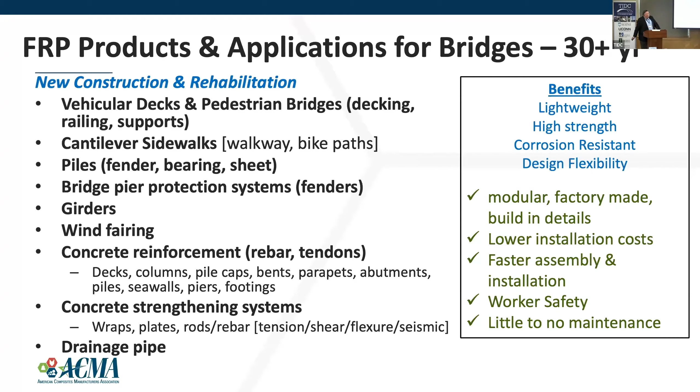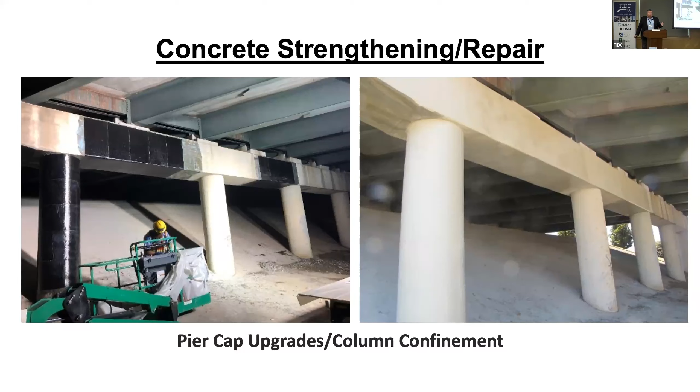So it all started off with concrete strengthening, right? There are 10,000 installations where composites have been used to strengthen piers, bents, columns, upgrades, seismic. So this was kind of like the first installation of technology. Today it's commonplace. No one asks the question. It's a given. We have guidance, we have designers, we have very experienced personnel, both in industry as well as structural engineers that know how to do this. This is wonderful to see such a mature part of the industry.

Prefabricated pedestrian bridges, first being all pedestrian bridges, but even something, and I'll talk about this, in cantilever sidewalks, where fast installation was the big deal. So when you look at this particular installation, this is the highway going to Dulles International. They had to shut down an 8-lane highway for 15 minutes to install this. They couldn't do it unless it was made out of composites. So it's that fast installation.

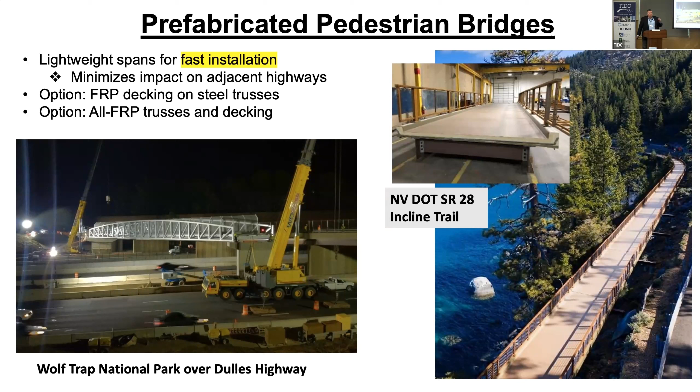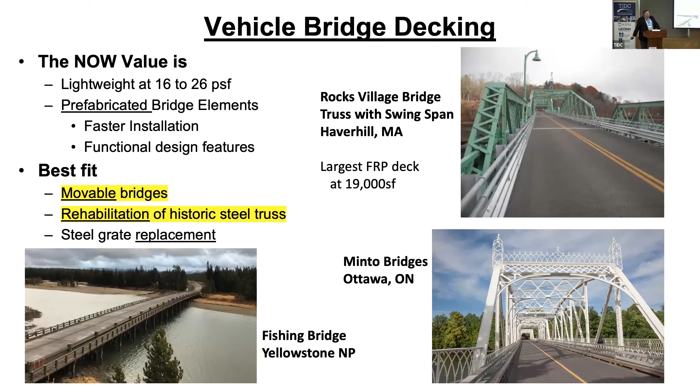Looking at bridge decking, very much involved, and this is where Roberto and I, back in the day, were involved with this. Developing structural shapes from pultrusion that provided unique applications, and they were most applicable to movable bridges as well as restoring historic bridges. So a couple of examples of those, and that continues to today.

Cantilever sidewalks, adding a structure to an existing bridge. So it's all about lightweight; the ability to provide pedestrian and bike access has increased across the country exponentially. And we could do this very easily as long as we specify those components correctly.

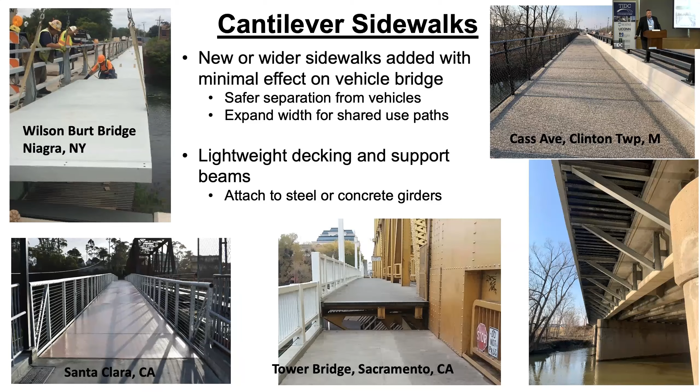Very much a part of University of Maine and the concrete filled arch girders. This has now become commonplace. Although it's not in every state, it's getting there and it has its unique application. But it also led to getting standards with concrete filled tubes for AASHTO. So that was very important.

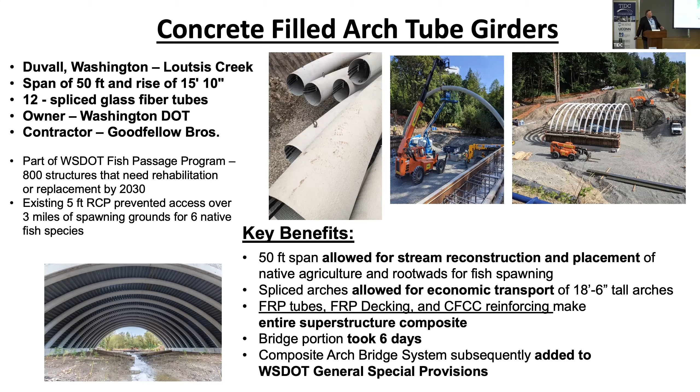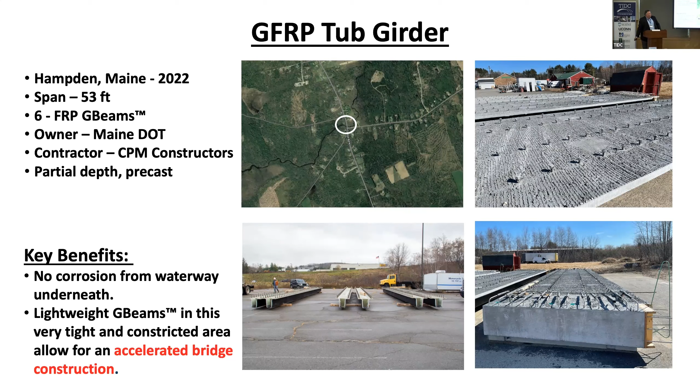And we're going to talk a little bit later about the tub girder, very much an iconic success story, providing another tool in the toolbox. I'm not going to touch too much on this. Rebar. Rebar has taken one heck of a journey, and it's always been on the leading edge of being accepted, starting from a state-of-the-art report to the first design guideline, going through 3 iterations.

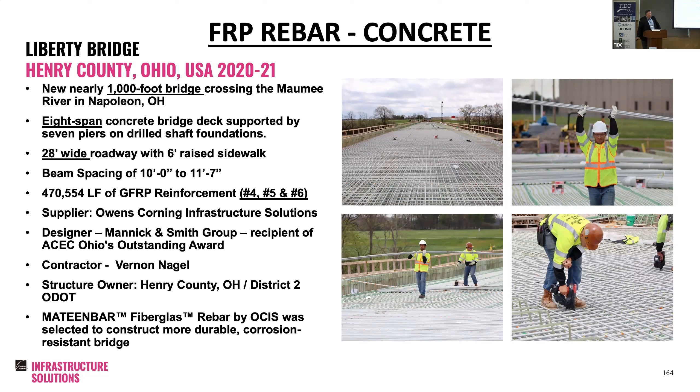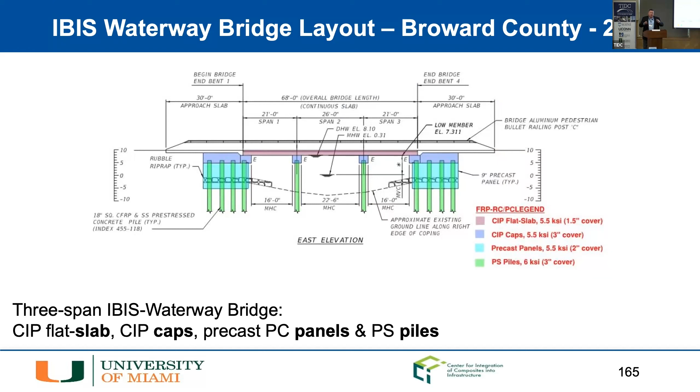So there's many other installations, taking that technology and applying it to flat slabs, cast in place caps, precast panels, even pre-stressed piles. So now we're starting to think about all the different elements that go into a bridge dealing with concrete. So we're taking the baby steps, but now looking holistically at what these structures can be built out of.

So, in the advancements in materials, we see basalt fiber. A couple of people are going to talk about thermoplastic composites and field bending. There are other resins other than vinyl ester resin that are being considered for rebar materials. And with all of this, standards are coming, and these standards are allowing the tools and the instruction as to what end users can do.

But the other big thing is the business standpoint. What we have seen over the past couple of years is that those who are specifically manufacturers for rebar, they're scaling up, they're increasing the rate as to what has been done before. They're expanding their facilities, they're building new facilities in different parts of the country, which is very exciting. And they're also modifying their equipment, making it much more efficient.

So there is a business case here that always needed to happen, but growth needed to happen a little bit first before they would make that decision. So this is very, very optimistic. And that's why you see so much about fiberglass rebar or FRP rebar.

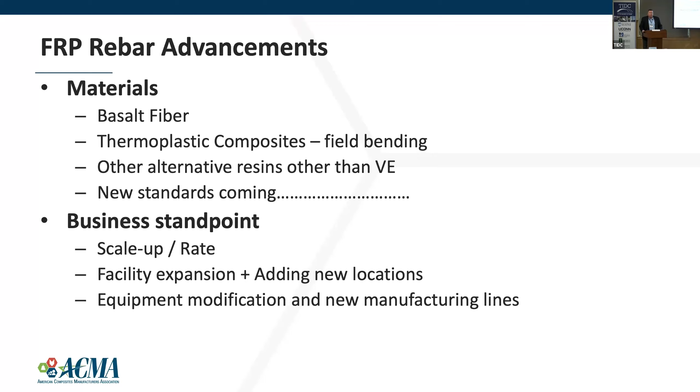And then came the FRP rebar code. And I'll tell you that this was one heck of a journey that took a village. The writing of this took about 4 years, being very, very specific because it's a dependent code. So 318 is the concrete building code. This is written chapter, verse, and every subscript available from 318. It's just then applied to FRP. So it's seamless for those that are very familiar with 318.

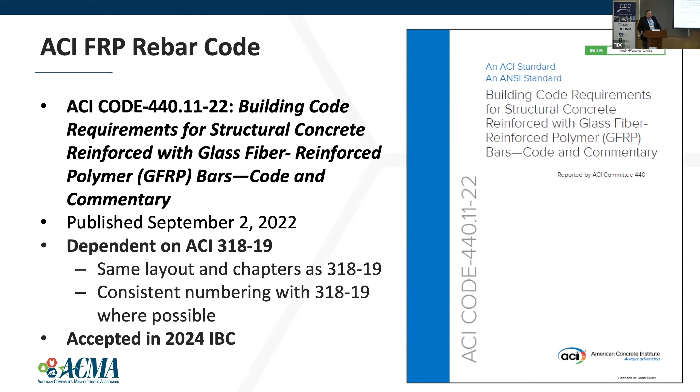And the nice thing about this is that it has been accepted by the 2024 International Building Code, the Model Building Code. And that is a big deal. So not only did we make a code document within the concrete industry, it's also now in the building code itself. This now opens up opportunities.

So when we look at the code, there's a lot of things it covers, and there's a couple of things that it doesn't cover. And the things that it doesn't cover doesn't mean that we're ignoring it. It's just that the research hasn't caught up with everything that is there. But it's still a very useful document for most concrete building element applications.

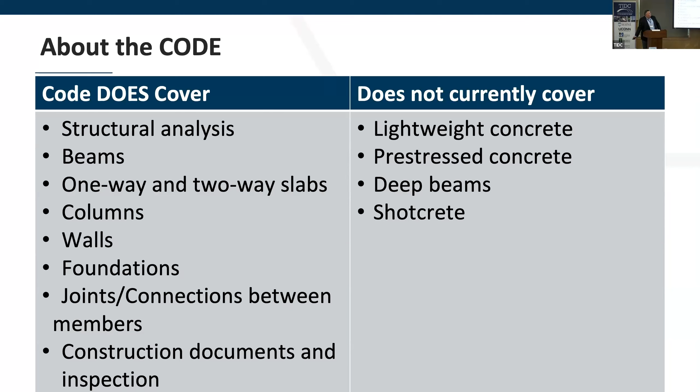And then along with that are all of the complementary documents that go along with it. So these are the other tools. So this construction specification is written like ACI 301, and it provides the contractors with the information that they need so they know how to use and place the materials.

And of course, always helpful, getting a design example handbook that is complementary to the code document. So this is currently under development by ACI. I suspect it's going to be finished sometime this year. It covers very good fundamental examples of how to utilize the code. So it's one thing to read it. It's also another thing to read the commentary, but to know how you work through the examples is a big deal. So expect that one.

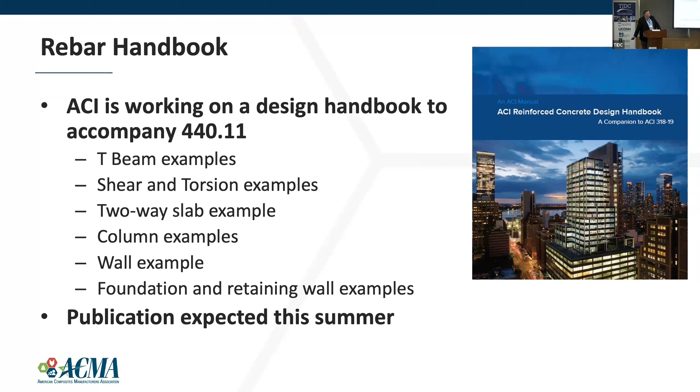Come on, there we go.

Now, this is the document that started all of this. This is the design guideline for FRP rebar. One of the good things about this is that it has gone through several iterations. It still is a state-of-the-art kind of document. So there are things that are not covered in the code, but this document does cover. So everything is complementary, but a lot of the guidance is really there.

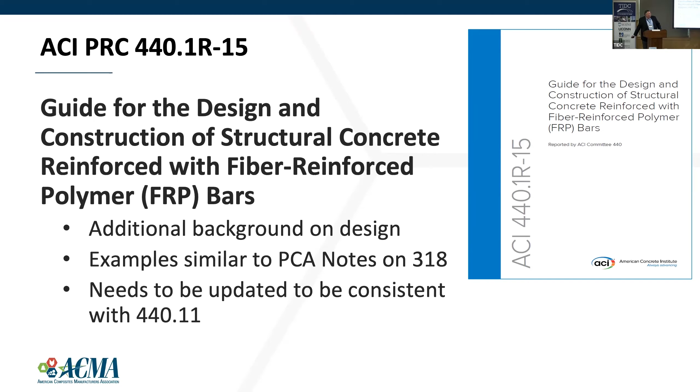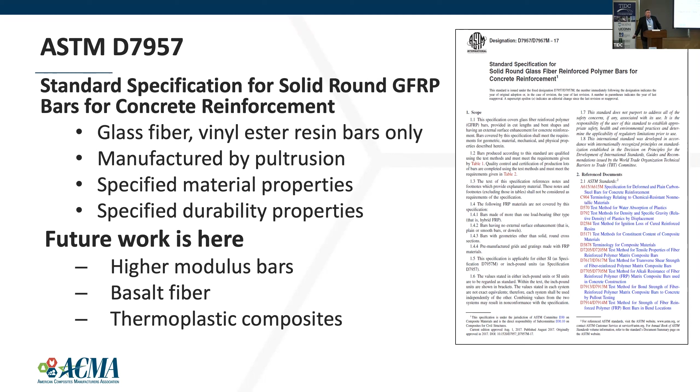And then we have the godfather, if you will, of all product specifications, D7957. And it covers how to test and to evaluate various different components that are out there. Future work is here: higher modulus bars, along with basalt fiber and thermoplastic composites, is coming right around the corner. So there's always an evolution.

And then we have the pedestrian bridge spec. So ACMA and our Transportation Structures Council Tiger team, if you will, is working on the update to this 2008 document that we worked with AASHTO to create. And it does a lot of different things.

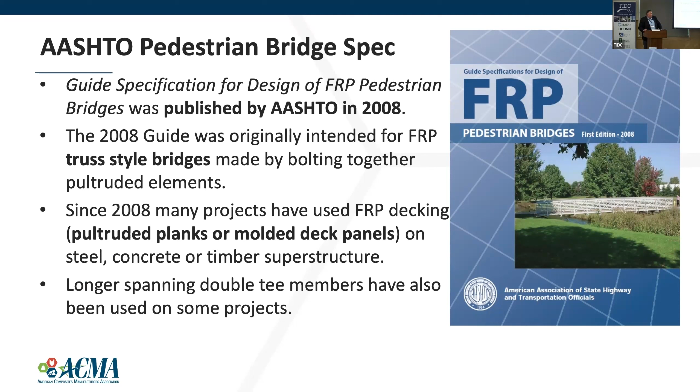Come on, there we go.

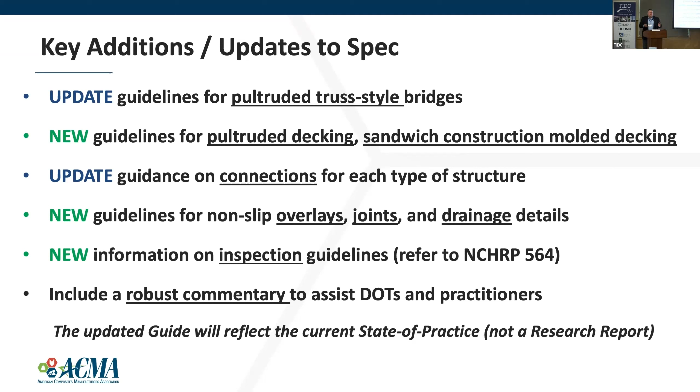It was based on the truss style bridges, but there's been a whole evolution of other types of composites and products that have been out there, including pultruded decking and sandwich construction that has been molded. We're going to do much more with connections. We're going to get much more in detail with overlays, joints, and drainage, and even cover inspection guidelines. So it's a really major upgrade to what was there before, because this is an important document for bridge engineers.

And as Roberto had talked about, the ASCE 74 document, this is everything about pultruded truss type profiles, and it's finally been approved for publication. We're currently going through the formatting of the document, it should be available. So this is going to be a major guide written in LRFD.

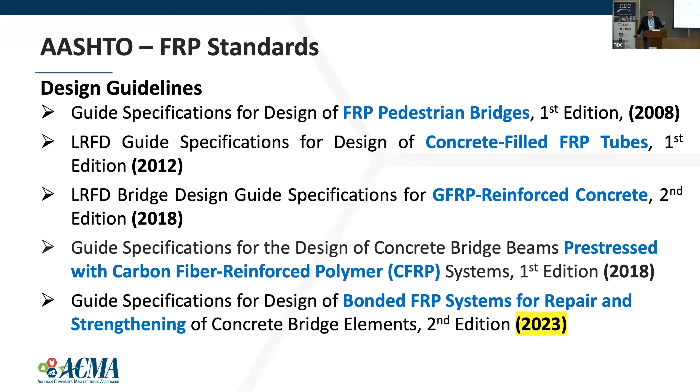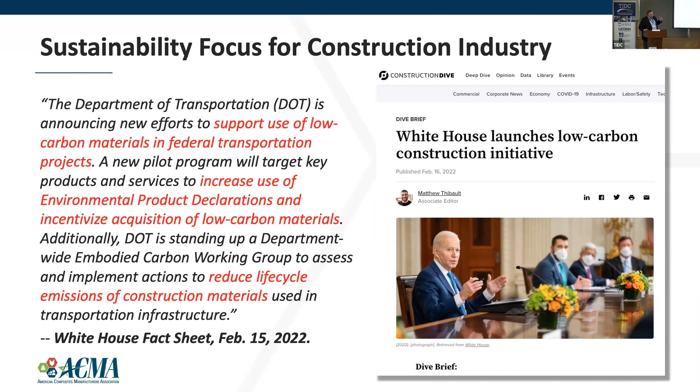Sustainability is a big thing. Last year, the Biden administration talked about environmental product declarations and how we have to be reducing the life cycle emissions of our constructed structures. And then everybody started asking, well, what do we need to do here? So now we're getting into a whole new challenge for the composites industry.

How do we develop the life cycle inventory data that is used for the life cycle assessments, which is then translated to the product category rule, which is the standard by which environmental product declarations are written. And those environmental product declarations are going to be utilized by building and construction authorities to evaluate a material and a product against each other.

And certain states like Colorado have a state law that unless environmental product declarations are in place, they are no longer going to consider those materials for their building and construction. So we have a timeline that we have to speed up and get work done.

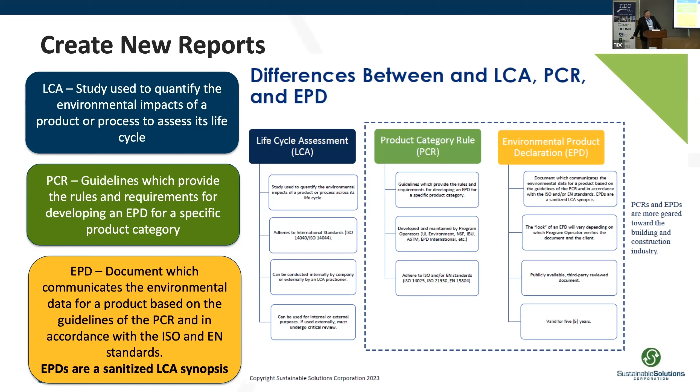So when we talk about, and Joe's going to talk a little bit more about this, you hear the words cradle to gate, cradle to grave. These are important facets of identifying what the sustainability of the materials are. And as a composites industry, we're good or just okay from cradle to gate. Where the composites industry and its products will launch and leap and be a huge benefit is in the use phase. But documenting what goes on in the use phase, which is a part of durability and how long it lasts, is a major accomplishment that our industry needs to be working on.

So what is ACMA doing today? We're working on a product category rule for FRP rebar. We're also doing a PCR for utility poles, so something a little bit different in infrastructure. And we're going to be working on a host of environmental product declarations that will help start the process to educate our industry. Working on LCAs is an important thing, but that's very complicated, and we need to study the in-use phase of composites and compile what our industry can do.

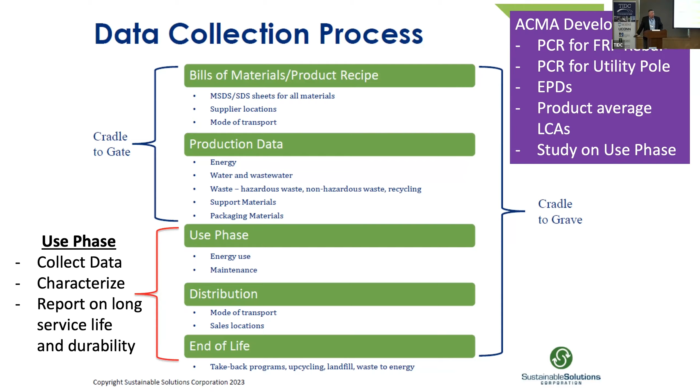Boy, this thing is temperamental.

So advancements in materials continue to evolve. We're always going to see this each and every year. There's a lot of new standards that are providing tools for engineers to utilize. And those engineers that have utilized composites are seeing success, and there needs to be more of that. We have a need to educate young engineers. Businesses are expanding, and this is a good thing. Sustainability will be our biggest challenge, and we'll see more of that in the coming years. And capturing and characterizing the use phase is the most important thing that we can do.